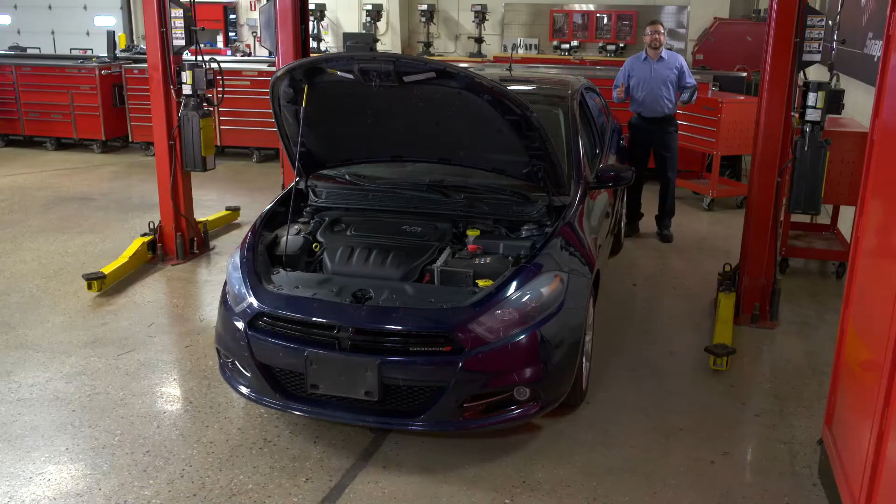In my shop, I want to be known as the guy who finishes the job in record time. The latest Snap-on software upgrade supercharged my diagnostic tool.

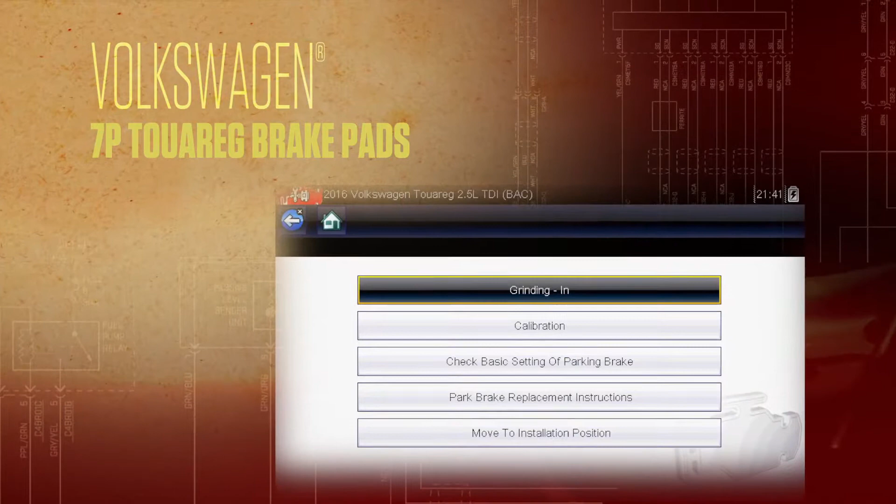Replacing rear brake pads is something I do a lot. On this Volkswagen 7P Touareg, I can tell the system that I replaced the brake pads and carry out the complex grind-in procedure. These vehicles use inboard brake shoes that have to be reset for an air gap and then ground in, prior to the system being able to work. Without my diagnostic tool, I'd be here forever.

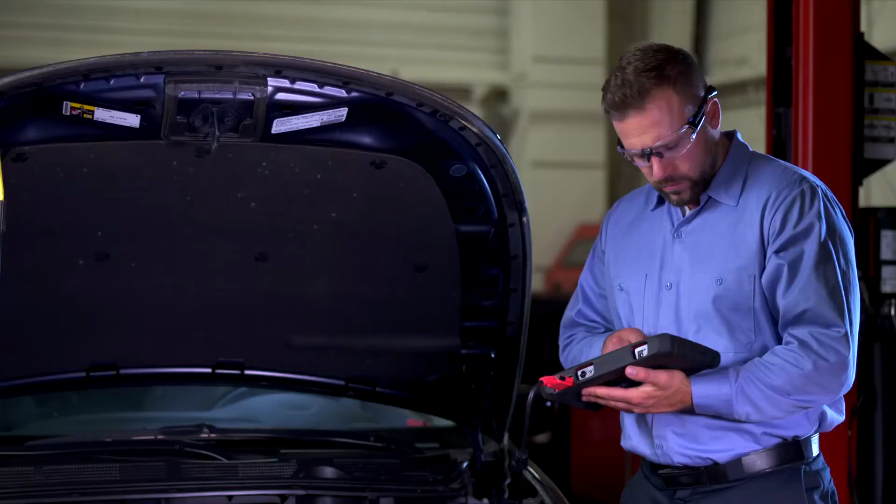There are 15 new automated tests for Chrysler vehicles designed to save me time. When I need to run a quick alternator test, it's right here. Plus Ram Active Airbox tests and calibrations. This catalyst efficiency test shows the health of the SCR system, which tells me if I need to replace any components. And that's just for Chrysler vehicles.

Check out these new time savers in 17.4. Time is money, and the latest software upgrade from Snap-on keeps me moving.

Modern vehicles are complex. After I read fault codes using my diagnostic tool, I use GCT to pinpoint the actual failure on the vehicle. With the latest software upgrade from Snap-on, I have even more tests at my fingertips. Over 40 makes are covered, and if the vehicle I'm working on isn't one of them, I can make use of the generic make option.

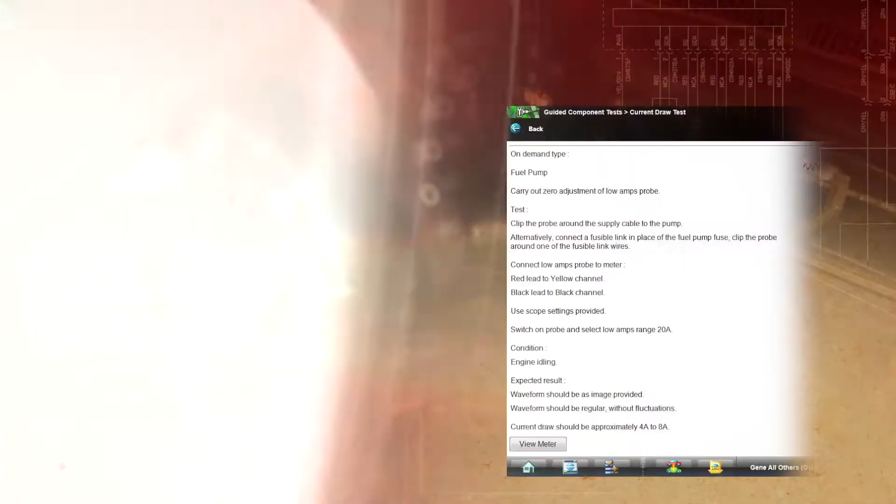Take a look at the spark ignition components available. Running a test is simple, like this low pressure fuel pump test. It covers a range of VW, Audi, Seat, and Skoda models, but can also be accessed via the generic make option. If I need some guidance, I use the real-life case studies to help me find the solution.

This one tells me how to identify the specific system being tested. Harness all this power on your next repair.

High-tech safety features like backup cameras and blind spot detection are appearing on more and more vehicles. Pretty soon cars are going to drive themselves, but they're still going to need me to fix them. And I've got the new Snap-on software upgrade, so my diagnostic tool is totally up to date.

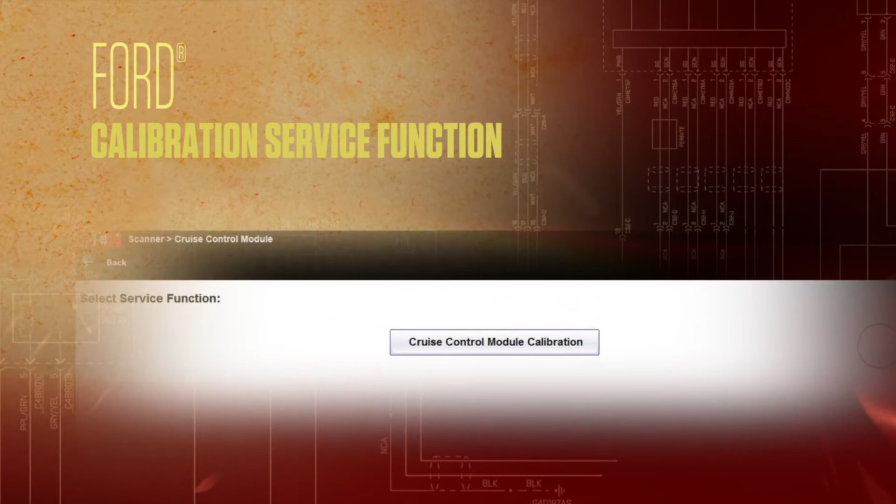Here on the Ford Mondeo is the Adaptive Cruise Control module. Check out this calibration service function, available on a range of Ford models. And here's the body control module I can use to reconfigure the rear video cameras.

Other safety systems include the image processing module, where I can realign the camera, and the parking aid module, which allows me to ensure all sensors are working correctly. Plus, there's coverage for all these other systems. New technology is no problem when your scan tool works like new.

There are millions and millions of cars on the road, so it's bound to happen sometime. The trick is getting those vehicles back in shape. The latest Snap-on software upgrade makes that a lot easier, with a ton of new coverage for systems that can be damaged in a crash.

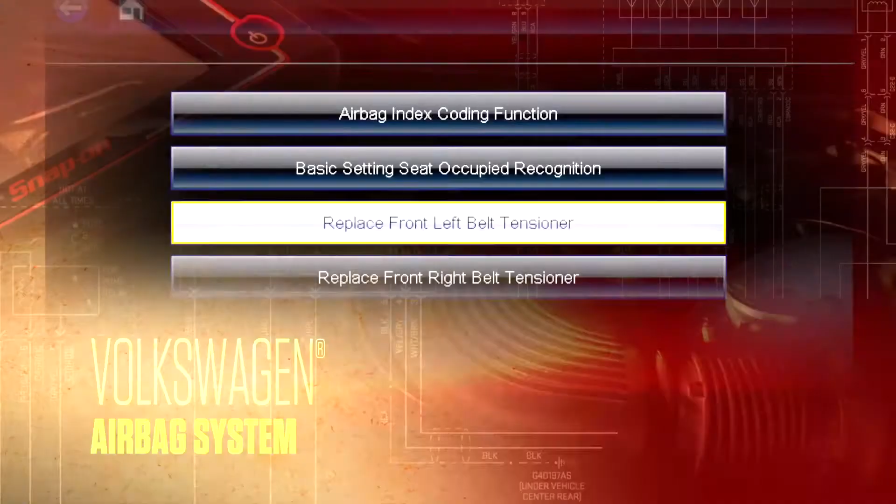For example, on various Volkswagen models, this new variant in the airbag system allows you to replace the belt tensioner. There are new features in the airbag system for Hyundai, including System ID, crash data, and passenger airbag status. And now, there's a special function for Renault Megane and Scenic models that lets you lock and unlock the airbag ECU. All you techs at collision shops, check it out.

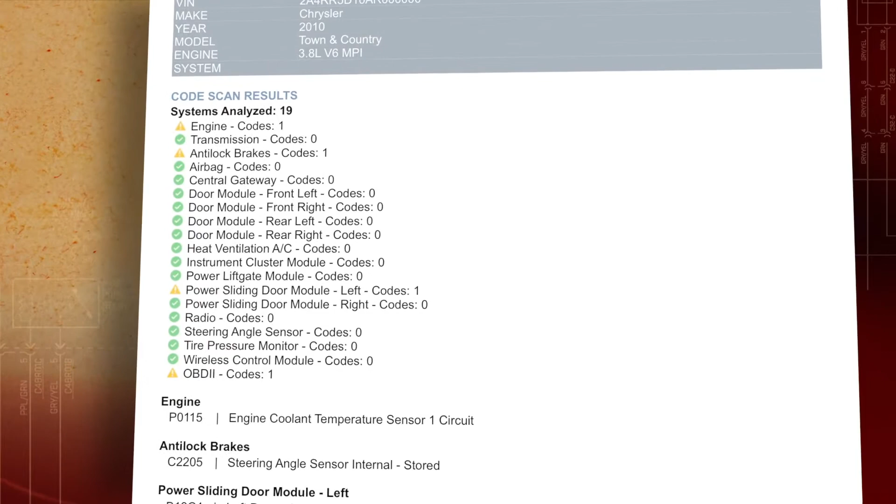There's coverage for over 60 makes and over 100 vehicle systems in here. Now you've got the capability to do a pre-scan when the vehicle comes in and a post-scan after the repair to make sure all the systems are working and properly calibrated.

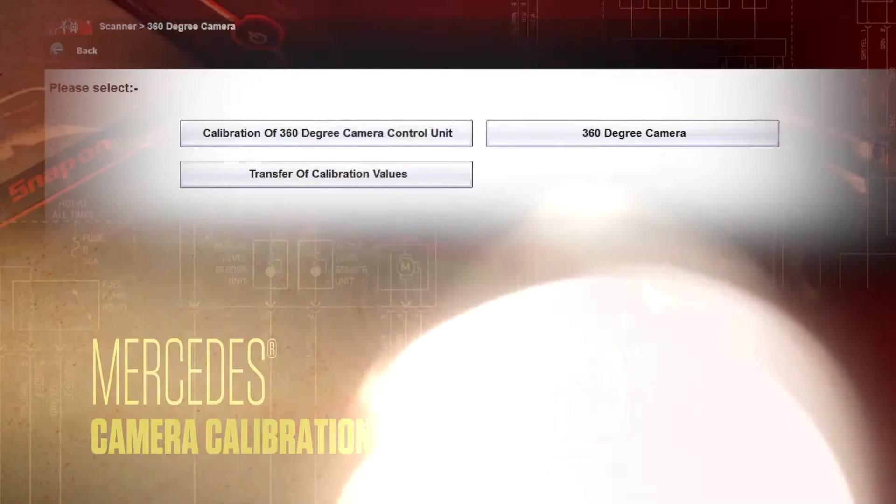Like this new camera calibration feature from Mercedes. Some insurance companies require those scans. When a collision shop brings me a vehicle, I can turn it around quickly and provide the documentation they need to get paid. Now the reality is, not all collision shops do their own scans.

So for general repair shops, this is a chance to earn some new business. With the latest software upgrade, you can win more jobs from that collision shop down the road. Make the fix at a lower cost than the dealership. You've got the coverage to fix the car, confirm the repair, and get drivers back on the road safely. The story has a happy ending, and you're the hero.